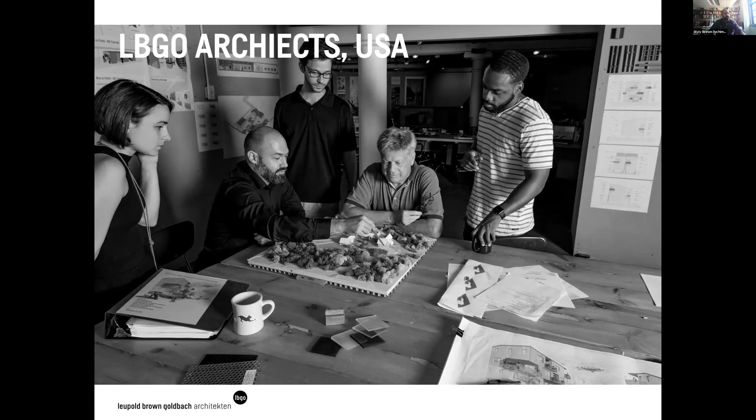We don't specialize in anything, but we work to improve the built world by developing practical yet innovative architectural solutions. Our design process is really based on extensive analysis and exploration of given conditions. We've done things all the way from stadiums to youth centers to restaurants to museums, a wide range of things that we work on in Europe and in the US.

What I like to do at the beginning of lectures is show a couple topics to demonstrate the breadth of what we do, to give you a taste and maybe a little teaser for Tanya to invite me for another lecture. One of the things I give lectures on is designing by combining landscape and interior, flowing inside and outside. This is a supermarket we designed in Germany, almost completely passively cooled. It's integrated into the landscape and made out of a lot of local materials.

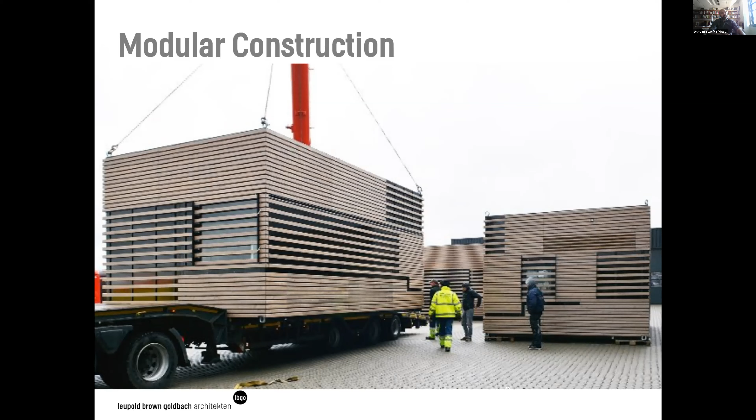But the funny thing about the teaser is I'm not actually going to talk about that, because I have another topic. Another thing we do a lot of and talk about is modular construction. These are some restaurant pods for the Expo Center in Munich, designed to be placed in courtyards with fully installed kitchens, kind of like food trucks but permanently placed, made modularly and placed over. This is the first round, and we were about to start a second round, but then COVID hit, so that's been held off. It's about innovative construction methods.

In the US, I give several lectures about sustainable and affordable housing. I've won a couple of competitions for this topic, but it's something I'm actually fairly passionate about, which is what I do a lot of my research on here at St. Louis: how to create better quality of living but with very low energy use, and making it affordable.

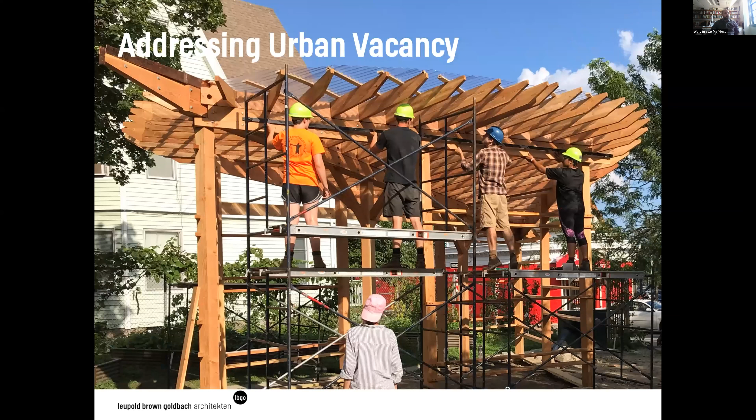And another one you might recognize - let's see, I think right here, if Olivia is still there, this is Olivia. I think she might be joining you guys, or she was helping out for a while.

This is another thing I do - I address urban vacancies. This is a project I worked on with Mass College of Art students to build a greenhouse in a vacant lot in the city of Boston. So a range of topics - these are just teasers to throw at you of different things I work on and think about, and you'll see them tie into the lecture later on.

But the topic for today is timber: yesterday, today, and tomorrow.

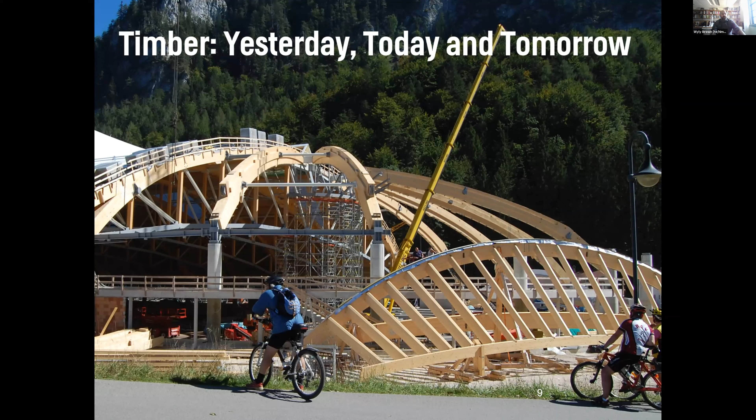Where I want to start is actually going to be kind of funny, because you guys know this project quite well - I've been following your Facebook feed from Hans House. As Tanya alluded to, you probably noticed my last name, and there's some people on the project with the same last name. Yes, I am related to them and have been involved with Hans House for decades, and been on several of these projects.

What I love about the idea of looking into historical construction methods is it's not only a means of preserving knowledge that could potentially be lost or on its way out - it's a way of really re-exploring the way we do things today by looking at the kind of decisions, decision-making, and processes that were done before.

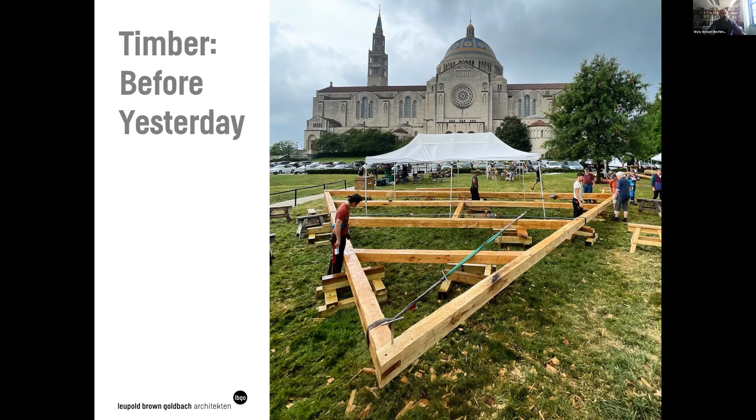Particularly when you're looking at something like Notre Dame, and we're in a state today of thinking about how do we lower energy use, petroleum products, and our carbon footprint - well, what's a better way to do that on a construction site than using an axe and a saw rather than a chainsaw or electric powered saw? Actually using human power and hand tools dramatically reduces the carbon footprint.

And we also start to think about this triumvirate, or three-legged stool, of technique, tool, and material. You start to think about how decisions were made in the time period Notre Dame was being built. Why use that material? Why use that type of joinery? Why use those tools? Why not something else?

Is this something that could be repeated today, other than in this thing? Probably not - it's probably not an efficient way to do it. I think one of the main issues is the lack of huge old growth forests, but it's something we can definitely look back at, emulating that process to think about what conditions today we might change or maneuver based on tradition, or old skills, knowledge, and tools.

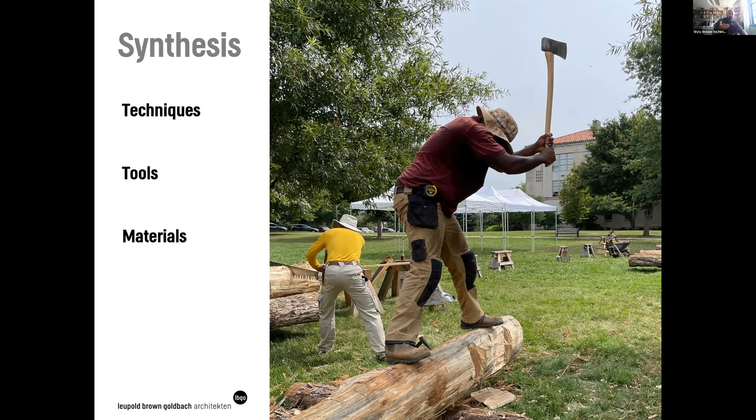Another amazing thing about it - again, I'm just stealing Hans House Facebook shots - is on projects like this, is that interaction, communication, and community. In a design project in architecture school we always think about forms and spaces, but what's wonderful about a building project, particularly going back in time and looking at another age, is really the community that's created, that bond of going through the process.

I know I'm telling you things you already know, since this is what you guys are in the middle of, but I think it's an important basis for thinking about how to go forward - by in fact looking backwards. I remember sound bites like 'you can't move forward by looking backwards,' but I completely disagree. I think one of the best ways to move forward is to first start by looking backwards.

So let's look at timber yesterday. I'm going to look at it on a small scale to start with, and then quickly get to a larger scale. Actually, Tanya, how long am I set for this lecture? Because I can make it really long or really short - what's the anticipated timeline?

Oh, okay, I can't hear you, but... This isn't that high - we're slotted for an hour, but... Okay, no, I can make that work. I'll just have to talk a little quicker and not be so verbose.

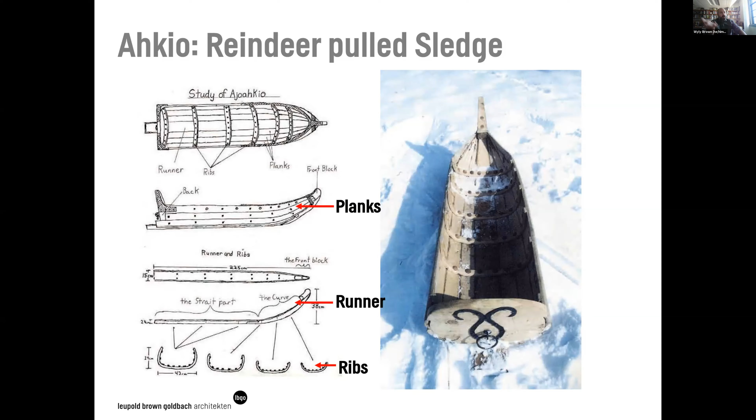Now let's jump up to timber today. Chronologically, I actually built these before this sled, but in the sense of designing with timber for performance on a small scale, I was looking at whitewater paddles, and the way we can look at specific wood species for their performative aspects in order to optimize a performative instrument.

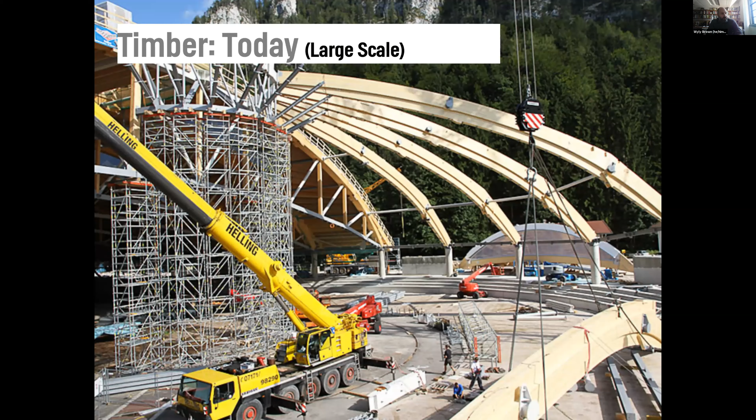Okay, so now let's jump up to a whole other scale of timber today. This is a speed skating stadium designed for southern Germany. This is one of the very first large scale projects I worked on back when I was working at a Danish architecture firm, in a town called Inzell, Germany.

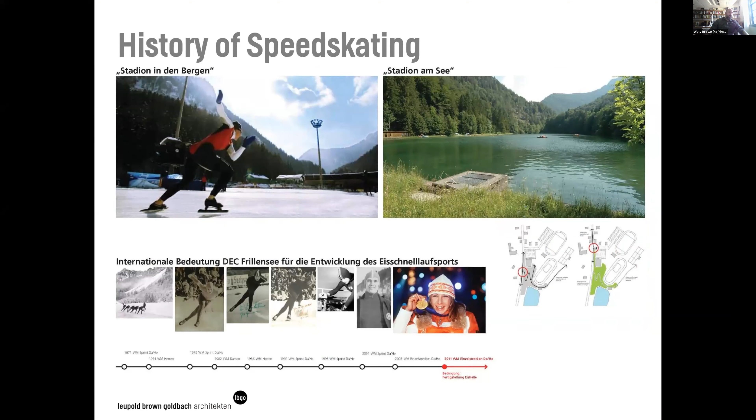It's an alpine town with a long history of speed skating. A lot of people have grown up here and gone on to be Olympic gold medalists or gold medalists in the speed skating World Cups. So they have this long tradition of speed skating, and they have this open stadium that they've had for a number of years.

But the issue became, around 2005, the rules of international speed skating changed, because the difference between first place, the gold medalist, and fifth place was often within one hundredth of a second. Sometimes between first and third place it was within a thousandth of a second. So if you have an open air stadium like this, you're only racing two skaters at the same time, some in the morning and some in the afternoon. And if you suddenly have a prevailing wind shift, it gives one skater an advantage and the other a disadvantage, depending on which way the wind's blowing.

So the rules changed to require a roof and a climatized track in order to continue to maintain world-class competitions. Inzell had this choice to make: do we want to let this fall into history and keep training people here, but really at a low amateur level, since at a professional level they need to be inside to train for proper conditions? Or do we want to build a new stadium?

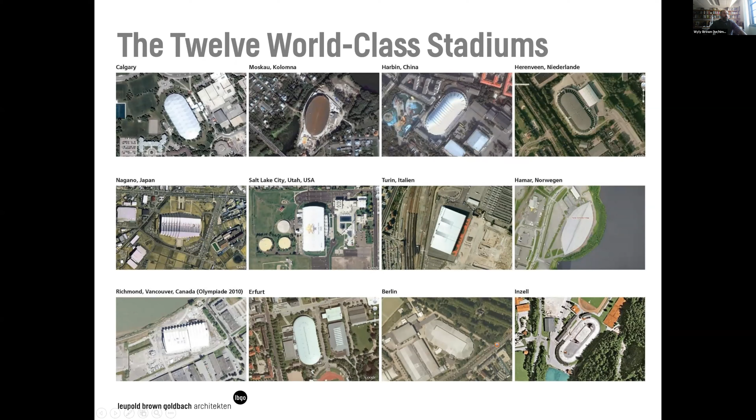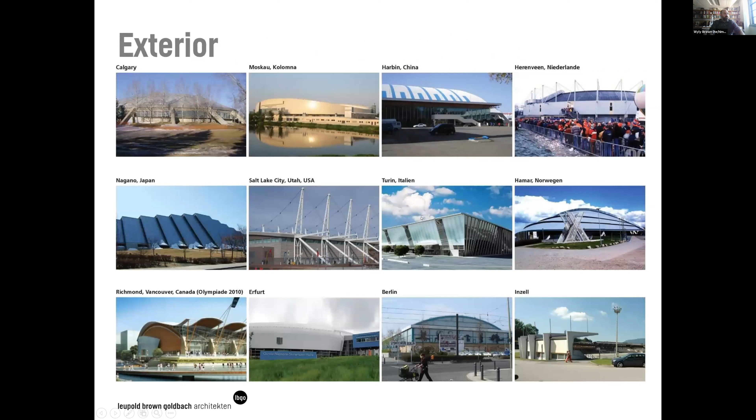Speed skating stadiums typically find themselves near train tracks or in an industrial area, not the nicest part of town. They're formally sometimes a little interesting structurally because of the huge wide spans, but for the most part they're just closed boxes with no access to daylight. When you're in them, you don't know if it's raining, snowing, daytime, or nighttime.

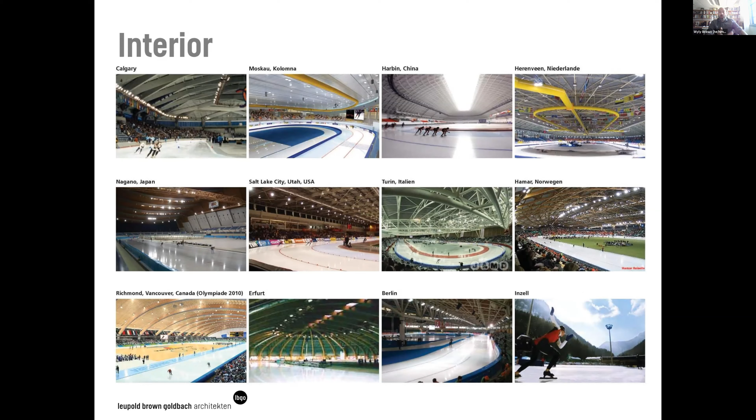So we came up with this idea. At the same time, we have this beautiful scenery you see down here on the right, and to block that out would be horrible. You really want to see where you're at, look at the beautiful mountains while skating, training, or watching someone else skate, and maintain this connection between inside and outside while still fulfilling those technical requirements.

So we came up with what I like to call the dumb diagram, or the nicer name, the systematic diagram, where basically we were going to build this globulous cloud that sits over a continuous landscape which becomes the track and the stands, maintaining the connection with the lake and the view of local mountains while allowing daylight to filter into the stadium.

This was even before we thought about materials or structure. These were just the concepts we wanted to work with, and then the question became how do we start to implement that?

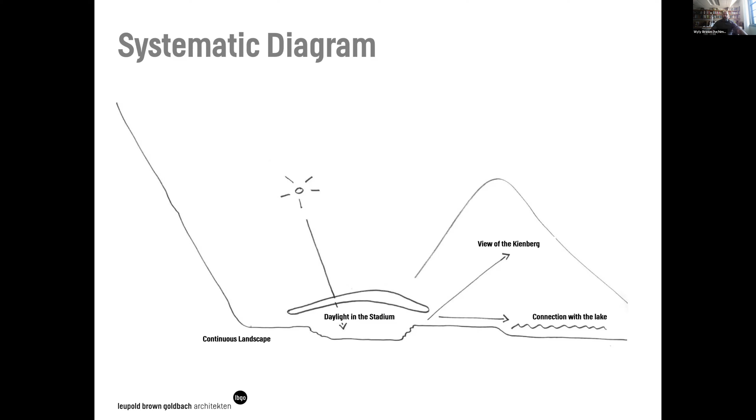The first thing we did was look at the span, which is close to 270 or 280 linear feet, so we're talking bridge scale. We really needed to focus on the structural system, and there was a desire not to have any columns in the middle.

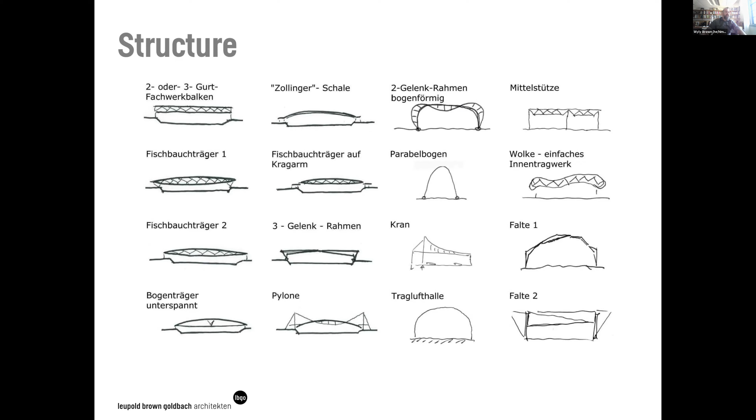So we started exploring different structural systems, which of course tie themselves to materials at some point, and we landed on going with a simple single span truss. And you were right in the middle of Alpine Bavaria.

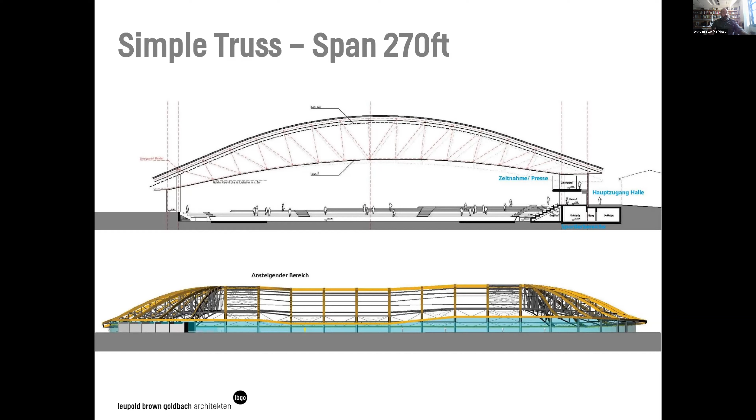The other question became how much steel are we going to use and how much wood are we capable of using? Can we even span something like this in wood, a locally available material, and what formal possibilities does that give us? At this point we were still mainly exploring on a pragmatic, financial, and constructability basis, because we had a really tight schedule, but it was always in the back of our minds.

Initially we were thinking we'd do a very lightweight, filigree roof with lots of steel bits, maybe a few wood elements, and allow light to filter through. But we immediately realized that was technically very difficult given the snow loads we were going to get.

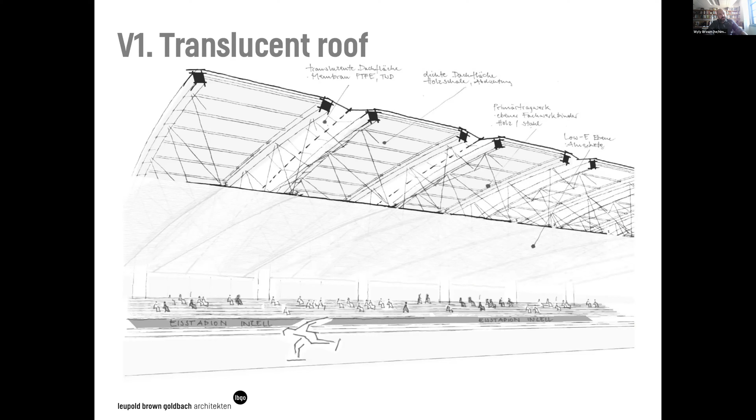We're going to get 6 to 8 feet of snow on top of this entire roof for a good part of the season. Just the year before, an ice skating stadium a few miles down the road had collapsed, and it was a wood structure. So the engineering requirements had suddenly been elevated to a much higher safety level, and we had to contend with these new rules coming out.

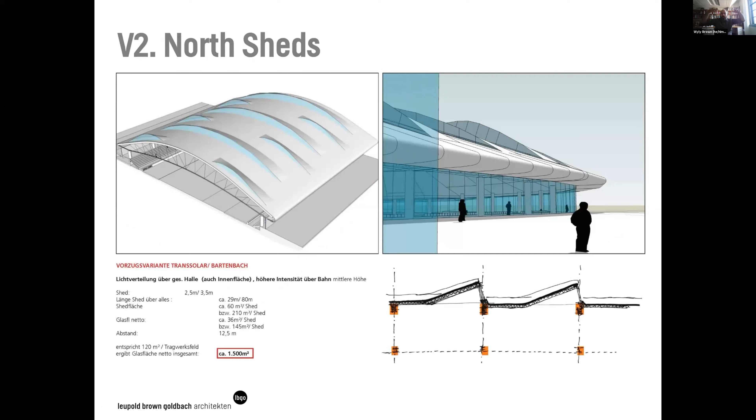So we started thinking, what if we use some ETFE foil membrane lights to allow light in right over the track and maybe down the middle a little bit? We explored what if we did north-facing sheds or lights that allowed only diffuse light in. That's where we started landing, as the most technically possible option was these north sheds. To test this, we did some daylight simulations to see how much light was getting in.

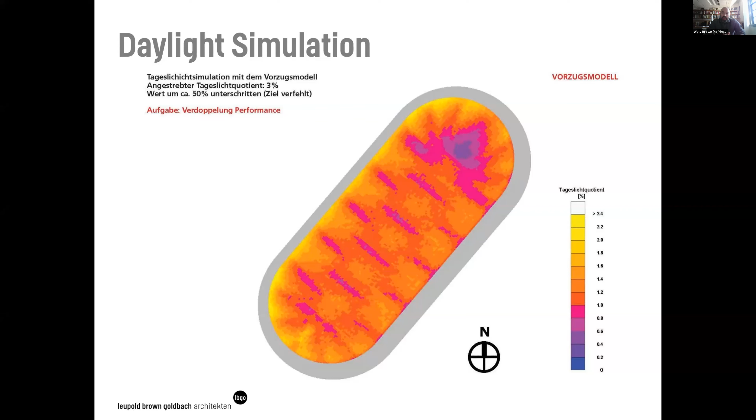And we saw that at certain sides of it, we could get enough light, but in the middle we needed a bit more light. So we had to start adjusting the shape and sizes of these openings to optimize the daylight. But at the same time, we had an issue where we weren't able to allow any direct light from going through these skylights and hitting the track.

So we created this, which is now actually pretty standard in Rhino, a means of evaluating day by day, hour by hour, where the sun position was and if light would touch the track. Daylight can't touch the ice because it makes it soft at that point, and if it's soft, that means it's slow. Depending on the angle of the sun, you might have hard ice where there's no daylight hitting it, and very soft ice elsewhere.

That would be very similar to when you're rollerblading and you suddenly hit gravel. It could actually be dangerous, it could have people trip and fall because it's that much slower than where they're getting speed. So we had to find the impossible mean between two conditions: maximizing daylight, but minimizing or eliminating direct light onto the track.

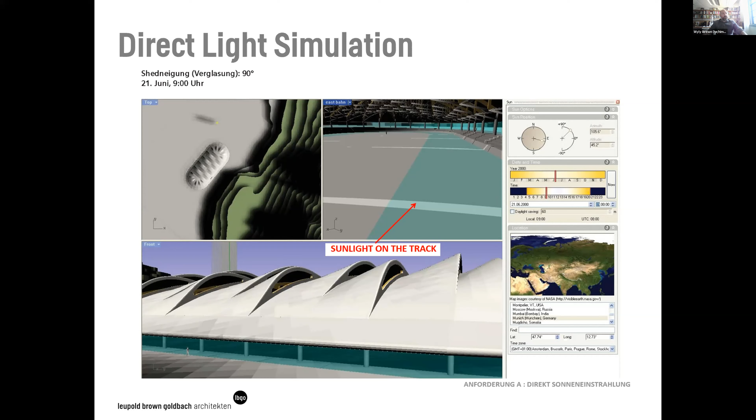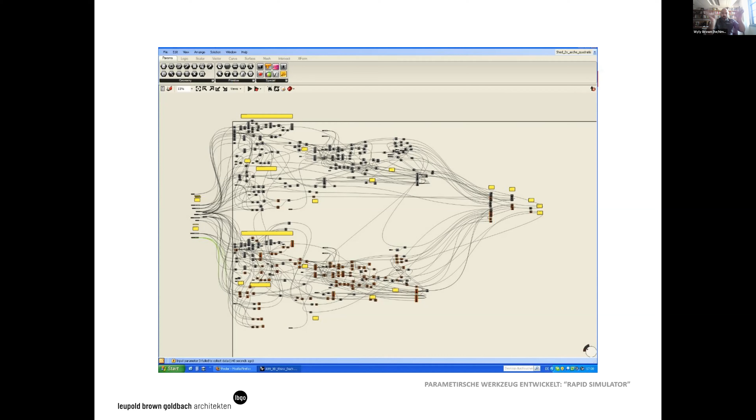So we created a complex, dynamic Grasshopper script that allowed us to change things very quickly, simulate what the results would be, and come to a conclusion iteratively using digital technology.

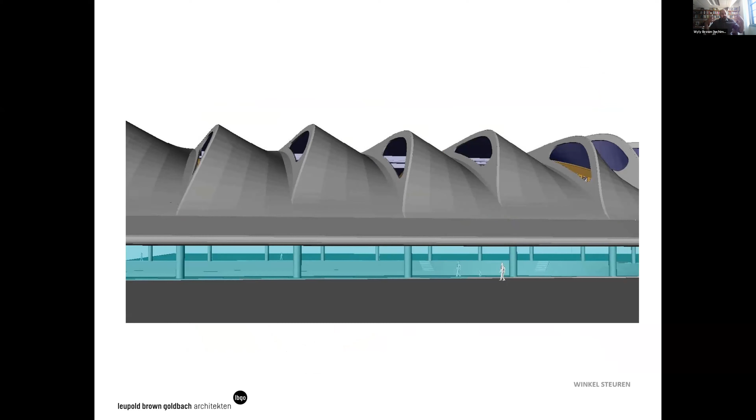So we created a script that would allow us to take these sheds and move them around, change the size of the openings with just basic sliders, change the angles, and play with what was the optimal location, running it through, seeing if any daylight hit the track, simulating how much daylight was going in, if it was sufficient.

And we very quickly, through this iteration and these simulations, in concert with Transsolar, which is a climate engineering firm, and some structural engineers, we realized those middle sheds were not going to work.

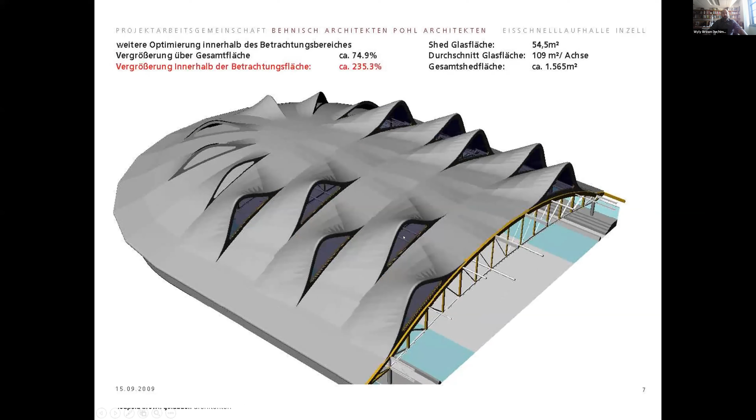So we split them. We tried to make that work. We realized we needed enough light, so we made these sheds much bigger.

And then we saw that as we start making these sheds bigger, snow is going to build up and start sliding against these skylights, which would cause major pressure.

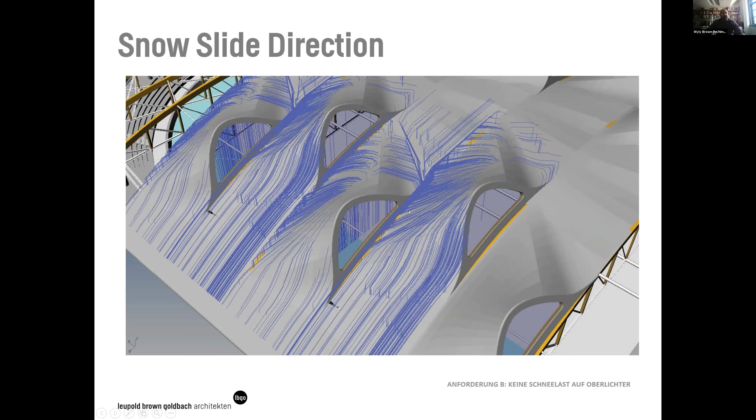So we wrote another little script to show the direction that snow would slide on these sheds. All these blue lines are the direction snow would slide. Here, snow would slide down and be harmless, but any snow that built up here would slide down and hit that skylight. So we had to take that into account.

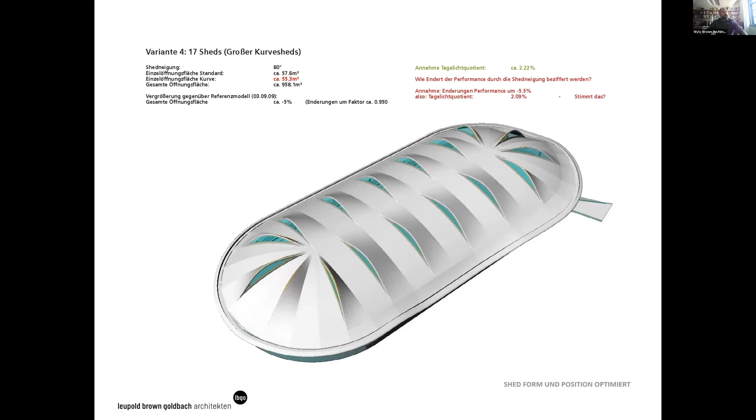So we continued using these simulations and reworking the form. We flipped them around, we halved them but made them larger. We did some shifting to allow for getting some snow in later and getting some skating later in the season. And then when we came up with a form that worked, boom, we rendered it.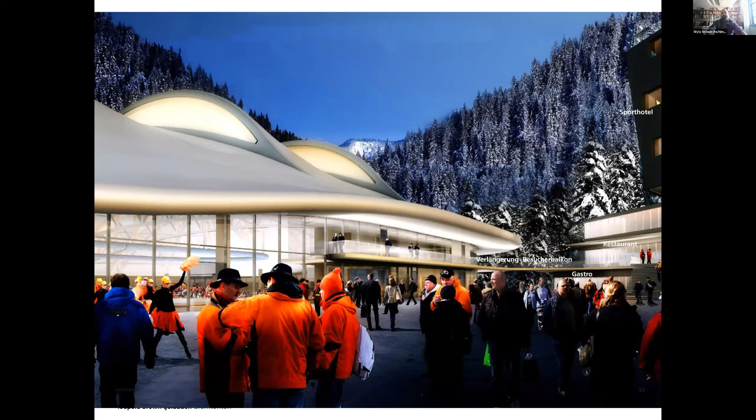We explained it to the client, we had the engineer pre-check it, and we came up with this form that would work technically. The question came, of course: well, how do you actually build a form like this? What's the best material to get these complex curves and get this geometry?

So we did a couple experiments where we looked at how you would build this out of metal or steel, and how you'd get those curves. What's interesting about steel is it's very good at making straight lines, but as soon as you do large curves, you have to cut the curved web for an I-beam out of a much larger piece of steel. So you're using huge amounts of material that produces waste that will be recycled, but you're still transporting, creating, extruding this huge amount of material, and welding a lot of custom beams.

Whereas when we looked back at how to use wood, I thought, hey, what about that paddle I did? It's basically the same idea. We've got three elements: a roof, which is kind of standardized, an edge condition that's bent around it, and these skylights that are formed and curved. It's basically a really big paddle. It's just timber, and you pick the species and the construction method to match the specific local need.

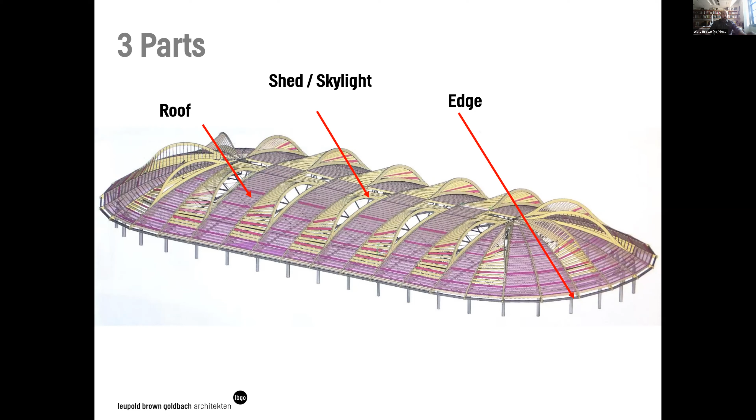And we drew it up. So here's an actual bid document for the roof. It's a little hard to see on the screen here, but every one of those joists, which appear curved, are actually straight lines.

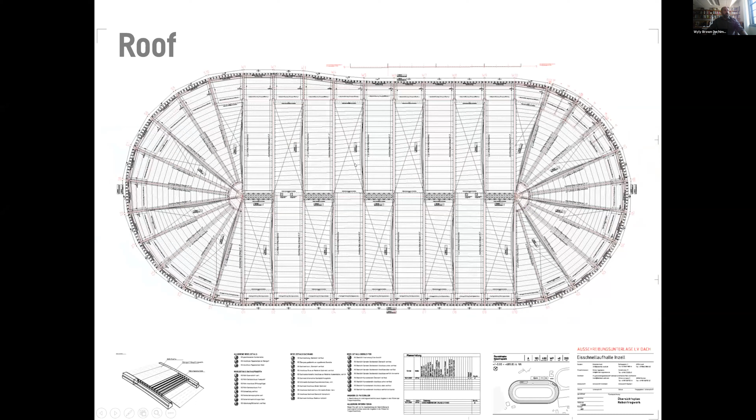The only curved elements are these front pieces, and then the ones that go around the edge. You can actually count the number of joists, and each one of these shed roofs is designed and created individually where it's located, with its exact shape and requirements.

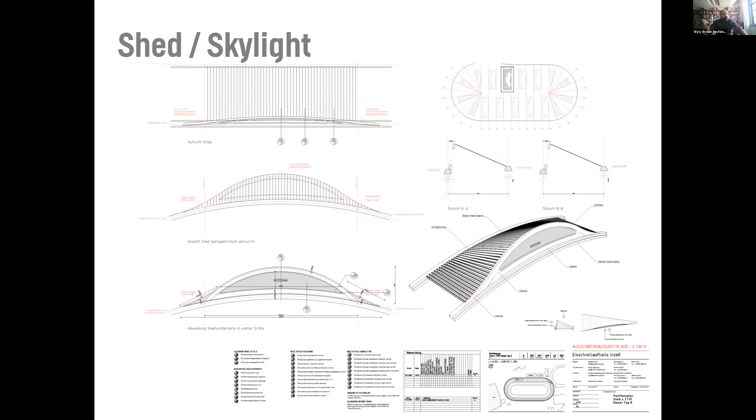We discovered that creating curved wood elements at this scale is pretty much just as easy as creating straight wood elements, because what you're doing is cutting it into little pieces and gluing it together. Here's that edge condition we see down here, kind of floating around the edge. We can create this curved system using cross-laminated timber, CLT, which is essentially like large pieces of plywood, and create custom forms.

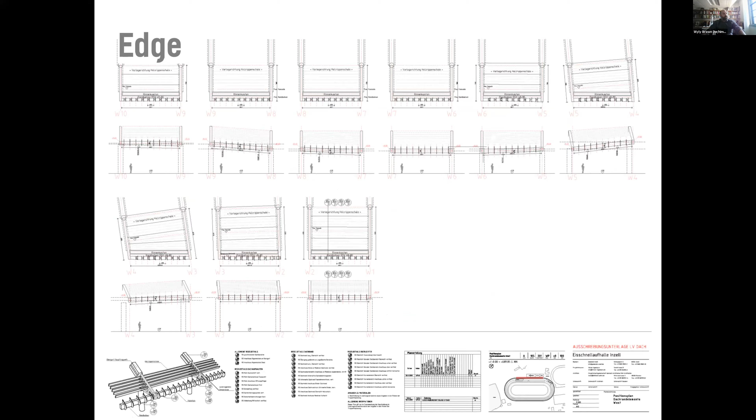Here's a picture of this enormous wooden truss. This is about 30 feet tall in the middle, meaning the truss from the bottom chord to the upper chord is 30 feet. You'll see that in a moment.

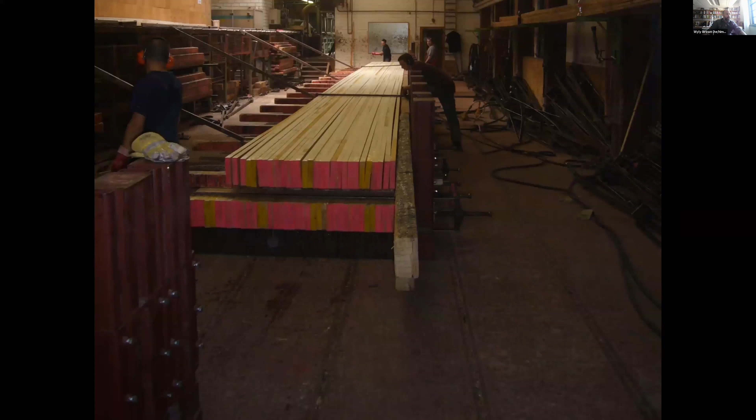We were able to make these curved wooden beams fairly simply, mostly with materials that came from within a few hundred kilometers. They were processed less than 80 kilometers from the site, and they were delivered - everything locally produced.

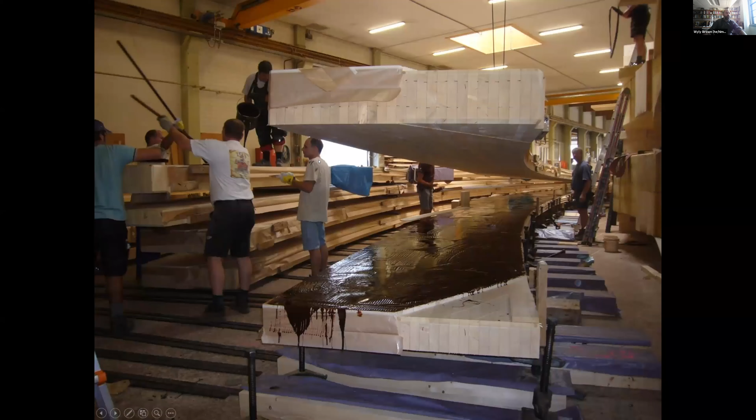You can very easily make curved pieces of wood by cutting them into thin strips, curving them, clamping them, and now you have fixed curved structural elements. Clamp it all together and then install it on site.

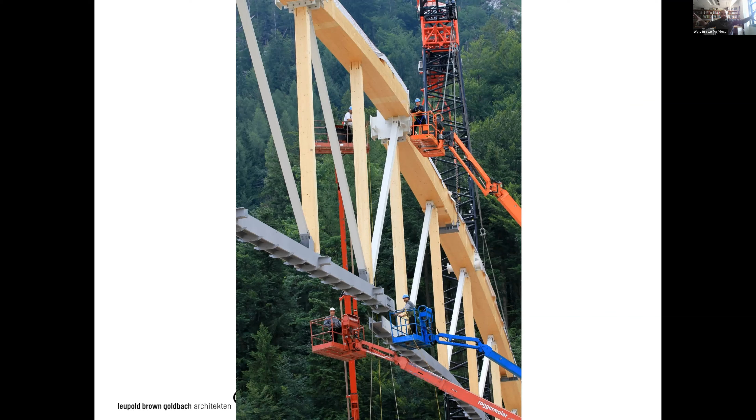So you start to see the scale of what's going on here. It's just about creating curved elements from straight pieces by scaling them down to a point where you can bend them fairly easily and put them back together.

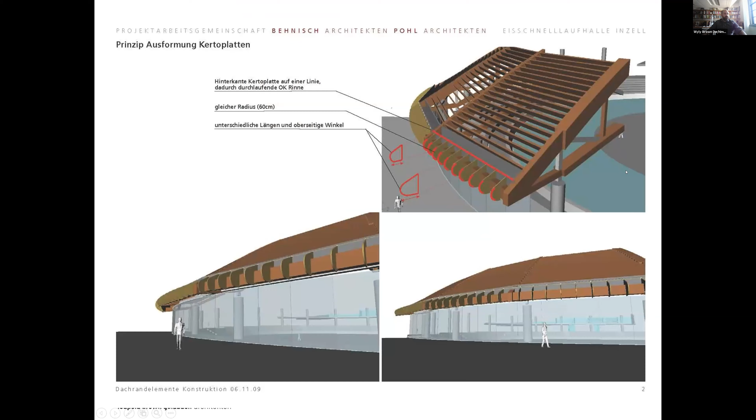Here's this edge condition, which is a compound curve where it curves not only in this direction, but sometimes up and down in the linear direction. That's created by just taking CLT, cross-laminated timber, and cutting it like plywood, creating these profiles that are then stacked.

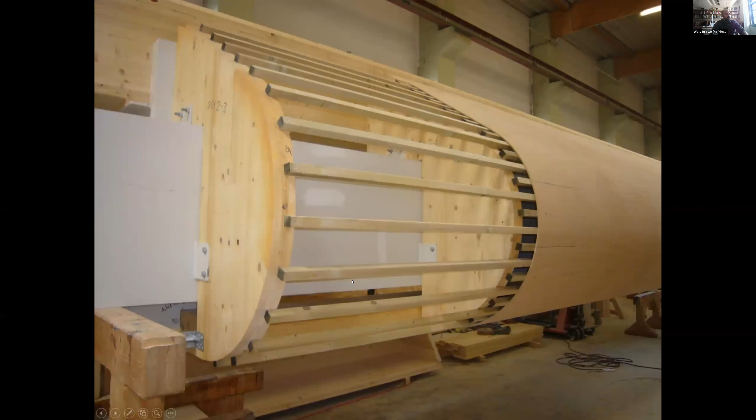Then wooden elements are spanned between, and then you take a flexible, thin sheet of plywood, form it around, and suddenly you have a whole series of these barrel-shaped wooden structures that are basically compound curves, all made very simply, very cheaply, very quickly out of wood.

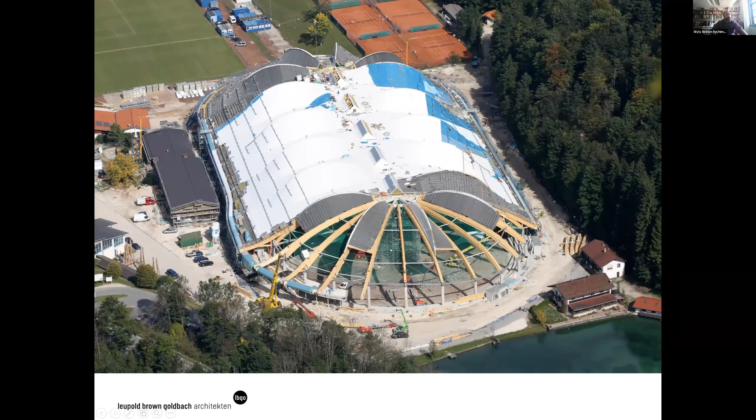Because of the fact that it's made out of wood, we weren't allowed to leave it exposed because the ice would radiate cold and cause condensation to build up on the wood. So unfortunately, we had to cover the structure in this low emissivity membrane.

And here was the World Cup in 2011, I believe. But we were able to actually create this very complex form using the properties of timber, and in a very sustainable way, gathering timber from all within a couple hundred kilometers.

So then it became this kind of iconic building along with their church. This is the town - there are two main things. A town of 3,500 people had their church as one of the key symbolic things, particularly that steeple, and their speed skating, and then the mountains.

So it's really looking at using timber technology today. You have cross-laminated timber and glue-laminated timber, which allows you to have a wide variety of forms. It's incredibly structurally stable, and it's fairly simple and relatively inexpensive to build that way.

So this is a lot of the opportunities that wood provides today. It can be used for all sorts of different types of constructions, and particularly cross-laminated timber is going into creating modular construction and all different types of things that are coming out of it.

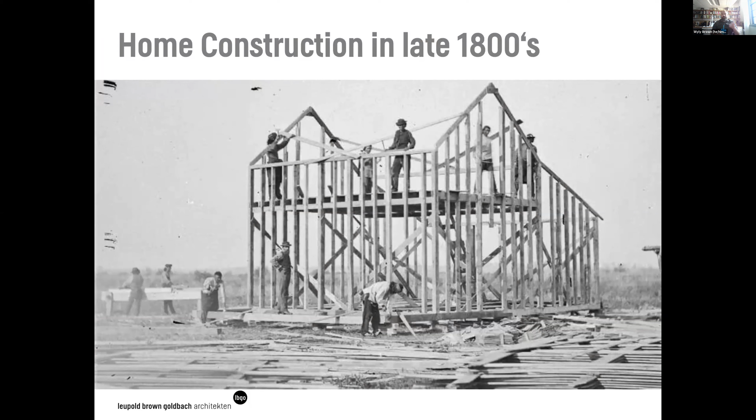I'm going to jump scale a bit here because, of course, this is much smaller than the stadium. Here's home construction in the late 1800s - basically balloon framing in the U.S. You have this vision of a nearby forest that wood was cut down from, and you guys are kind of going through this right now. It's milled into long linear elements, and you create a multi-story house, doing it mostly with hand tools and local labor.

Well, here's home construction today, which kind of strangely enough, when we're talking about timber construction, looks remarkably similar to what we just saw from over 100 years ago. This building I'm showing you is one I designed, which is LEED Platinum and won a competition for innovation - it's actually an energy positive, affordable house in the Boston area. And basically the same means of construction: you have some local labor walking around with some sticks, putting it together on site.

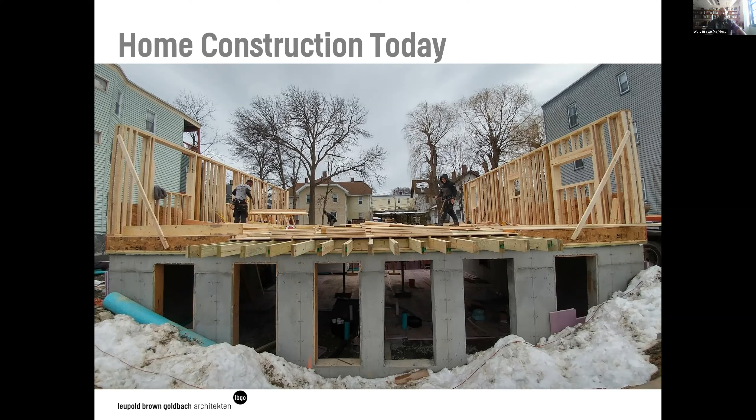Since the financial crisis in 2008, the increase in demand for new homes combined with a shortage of skilled home builders has been driving up construction prices. So even building the same way as we have for 150 years, prices have been going up and up since 2008, and we're not building enough homes. In fact, in 2019, we were about 200,000 homes short of fulfilling our need, which is increasing demand for home builders, while young people are not going into the trades as much as they were 10, 15, 20 years ago. So costs are going up, and maybe there's a need for rethinking.

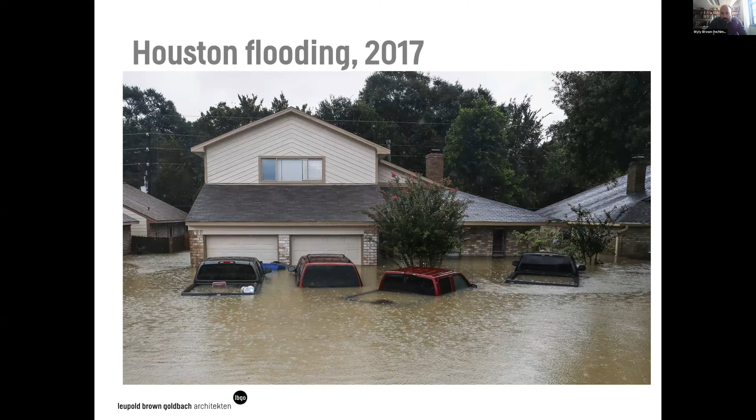There's also a question of what climate in the US your house is designed for. Is it designed for the California wildfires happening this summer and in recent summers? Are material choices optimal against fire where that happens frequently? Are they optimal for the flooding that might happen in Houston? For the snowfall in Colorado? Or the dust storms in Arizona and the desert Southwest?

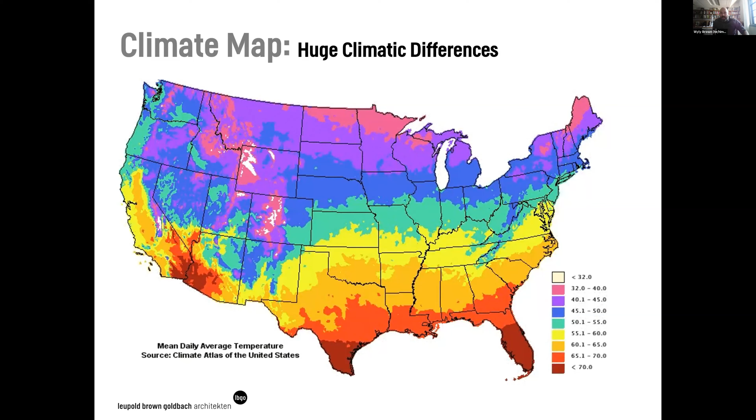The question I'd ask is: which climate region is this material aisle optimized for? You go to pretty much any box store like this, anywhere across the nation, and you'll find the same supply of materials.

So the question I ask is, what is the alternative? What is the future of this? It's already too expensive for us. So can we create a variety of alternative materials?

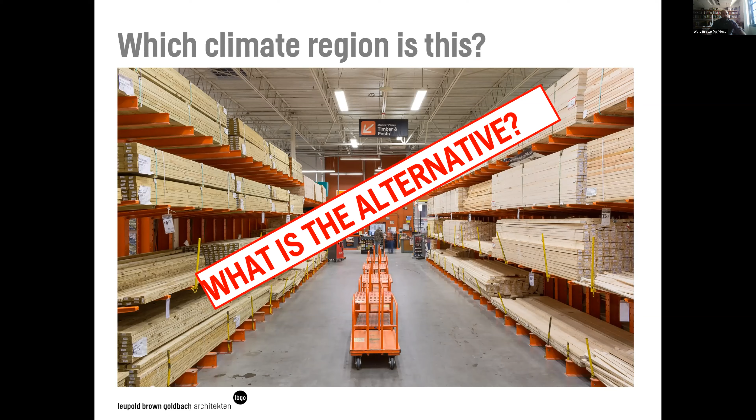This is something I happen to research in a lot of different ways. One of my favorites is a conventional material in Europe—a sustainable structural masonry that actually has very good R values, or low U values depending on how you look at it. But it's not in scope for this lecture, so I'll just throw it out there and leave it.

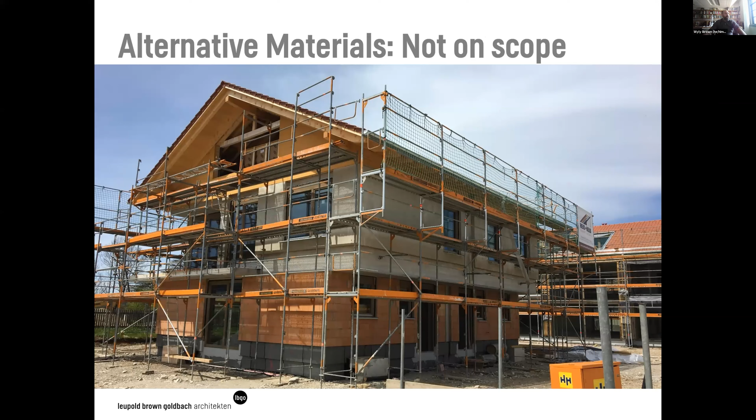But I went on a search for timber alternatives. Again, I really feel there's value in looking backwards, sideways, up and down at different locations and historical means of construction in order to answer questions we have today.

So in late 2019, a couple months before the pandemic hit, while we were still allowed to travel, I flew down to the Osa Peninsula, Costa Rica, to look at a permaculture farm and take a bamboo construction class. I arrived in the jungle next to the beach, where you can watch whales breaching and see dolphins, and you're in this location where you see this amazing bamboo structure.

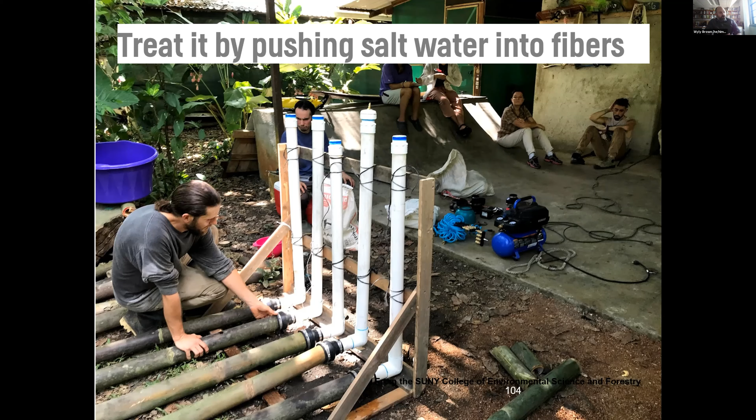Where does that bamboo come from? You walk about 100 feet to the bamboo clump, get out your Sawzall, trim a couple of bamboo stalks, and take 2 or 3 people to carry a 40-foot long piece of timber out of the woods. You treat it by buying about $800 worth of PVC and plumbing fixtures and a compressor, and you push a salt water mixture with a little borax in it to push out the sugars and fill the fibers with salt water. You stick it in a little shed for a couple months, and then you build some amazing structures, all done within a few hundred feet.

Now, I'm lying a little bit—this is Bali, not the Costa Rica place, but the same principle applies. All the timber and materials were taken from within a few hundred feet of the location, maybe a few miles.

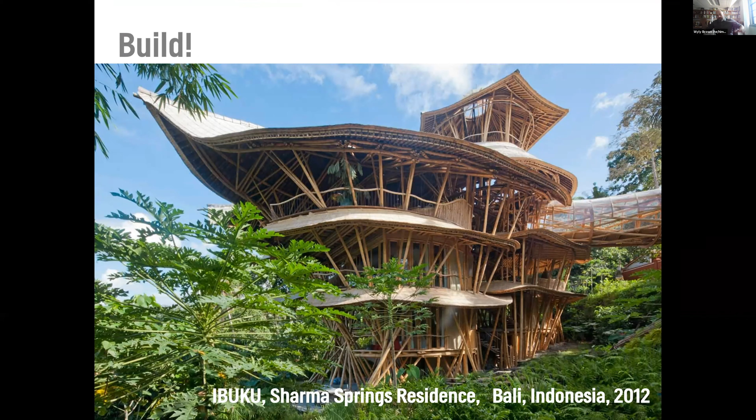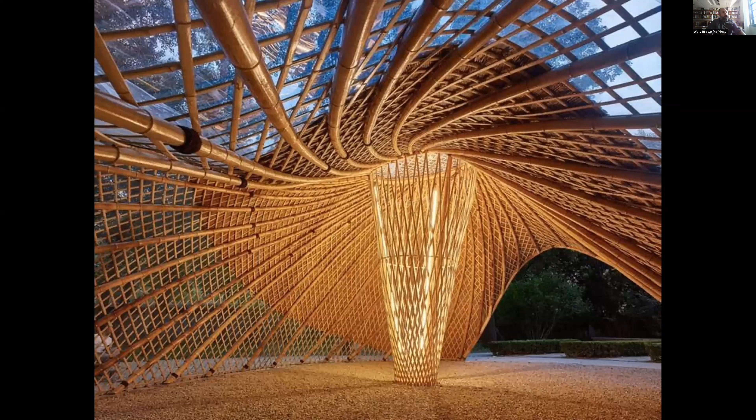Maybe there were a few little pieces of steel and other members that came from farther away, but a majority of the materials came from locally sourced, very low energy processing. So here's just some examples of what bamboo timber can actually produce. And I was like, very interesting.

So in the tradition of Robert Venturi and Learning from Las Vegas, I'm thinking, what can we learn from San Jose? This is great in a tropical environment, but can we learn something from this? I pulled some slides because I was worried my lecture was getting too long. You're even able to go get lunch by pulling a papaya off the tree or picking a pineapple off the ground.

You're in a place where it's a permaculture forest, where the food we were eating was locally grown, the materials we were building all the things out of was locally grown, and the labor came in from St. Louis and from all around the world. But is this something we could go back to? Because that was the idea from the initial 1800s balloon framing, the idea of locally grown materials, which we've kind of lost in the shuffle of trying to maintain that convention.

So looking at the climate zone map again, with the hardiness zones, first thing I discovered is that there's actually plenty of species of timber bamboo that could grow in St. Louis, which is climate zone 6. But you see climate zone 7, where you guys are, probably even more species would grow, because there's like 1,400 different species of this stuff. And what could grow here could grow up even in New England, New York, and Boston, and a lot of different places.

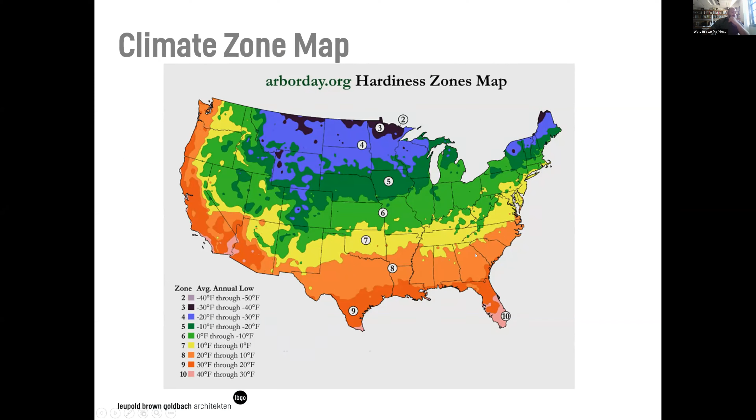Here's a handful of different timber species that could grow there. I even brought home a chunk. If you guys can see, this is a piece of timber bamboo right here. It's pretty big and round, probably 6+ inches in diameter, with a thick wall. It's just a little chunk because I brought it back. But this is actually a species that would grow in St. Louis. It would grow not quite in Boston, but maybe in New York. It would definitely grow in DC. It can grow readily in North Carolina, and all over the US.

And what's interesting about bamboo is it's not actually a timber, so I'm kind of lying to you. It's a grass, and it can grow within a handful of years. You can have a full harvestable bamboo grove in about 4 to 5 years. You plant the rhizomes, which start with these small little bits, and then after 4 or 5 years, the rhizome is established and will start shooting up full size timber bamboo culms. But what's interesting about bamboo is it grows very differently than we think about timber.

A softwood tree starts small and grows its way out. A piece of bamboo, once the rhizome is established after 3 or 4 years and is healthy, will shoot up a culm in its full diameter and reach its full height in about 3 months. Then it actually starts to grow inward, so the hard, incredibly high tensile and compressive strength outside is there right from the get-go. It grows inward and the inner wall starts to harden over 2 or 3 years. At about year 4 to 5, you can harvest it and have very strong timbers that are an optimal shape for a lot of things. It's round, it's hollow, it's light, it's got all the structure on the outside. It's really an optimized shape for structural struts, for example.

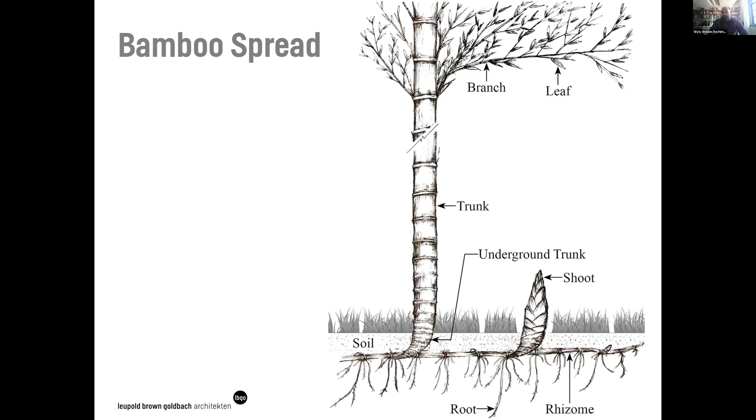Of course, one thing you have to control is how it spreads. There's a whole series of ways of doing that, which I'm not going to go into because I want to move forward. But you see here's a bamboo bud coming out, and it comes out in its full diameter and then shoots up in about just a couple months.

So I was sitting here thinking, okay, I'm back in St. Louis. Let me take a look at how this could actually be something we could do in the city. Is this an absurdity? Is this just one of those pie-in-the-sky crazy ideas that madmen think about that really goes nowhere?

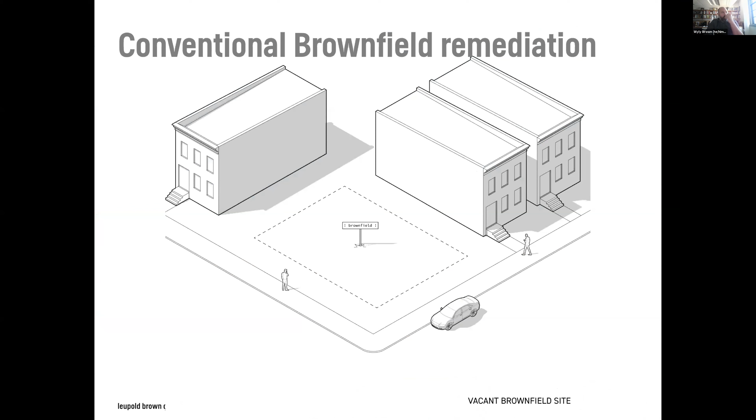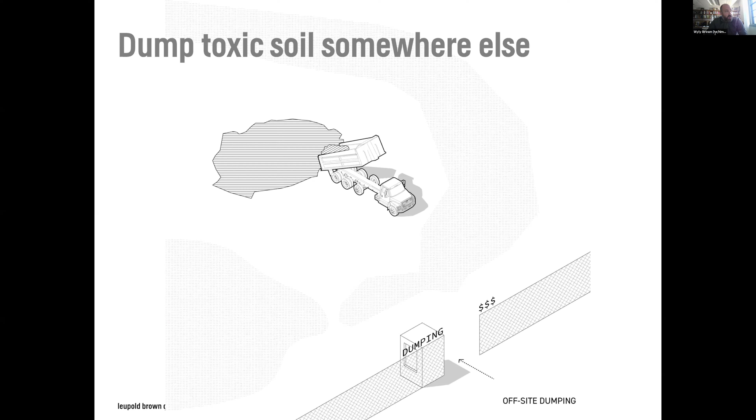So what do you have to do in order to make a site buildable? We have conventional remediation techniques. What we normally do with a brownfield site is dig up the toxic soil and dump it somewhere else, which is also questionable—where are we dumping it, and whose property are we dumping it on? Right now that's not a valuable spot of land, but maybe in the future it is. Then we bring in new soil. This is the typical way we'd remediate a site, which is very expensive. There's a lot of national funding for this, but it doesn't necessarily solve the problem.

It just kind of pushes the problem under the rug somewhere else, which, in the context of environmental racism, is maybe a whole other topic for a whole other lecture.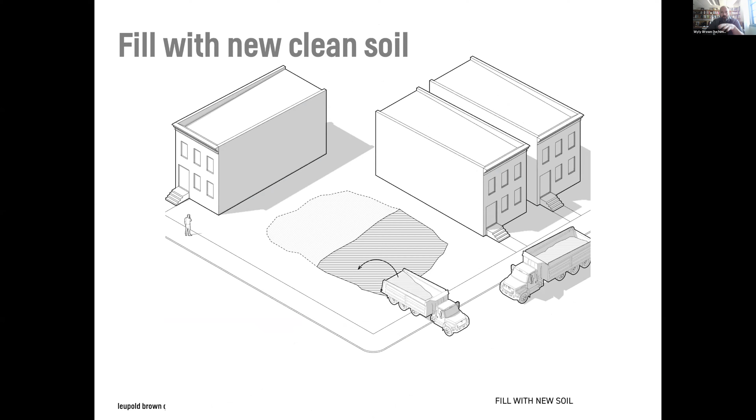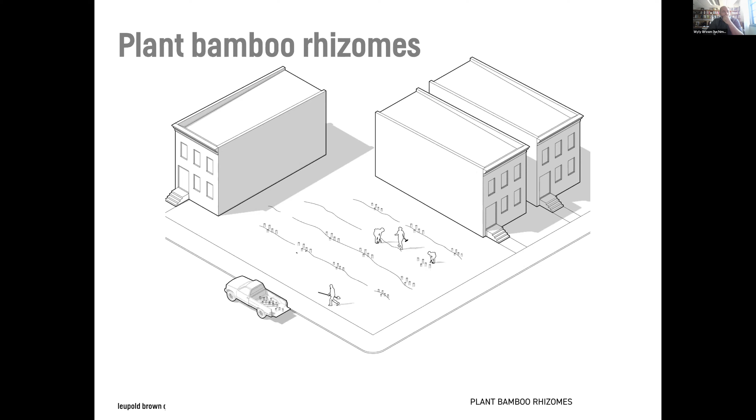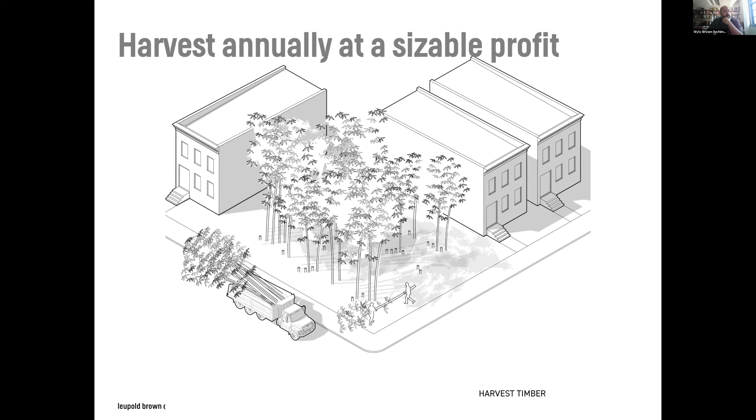But what we discovered is that in China, research shows bamboo can actually remediate heavy metals out of sites. So what if we planted bamboo in an urban condition, planted the rhizomes, enjoyed a beautiful grove park, and harvested it annually for a sizable profit? According to commercial bamboo farmers in Oregon and Florida, you can make tens of thousands of dollars per acre per year harvesting bamboo, and you're not clear-cutting it, just harvesting the culms that are a few years old. Then if you want, you can remove it and move on to the next site to build a house or something else, but you've now remediated the site.

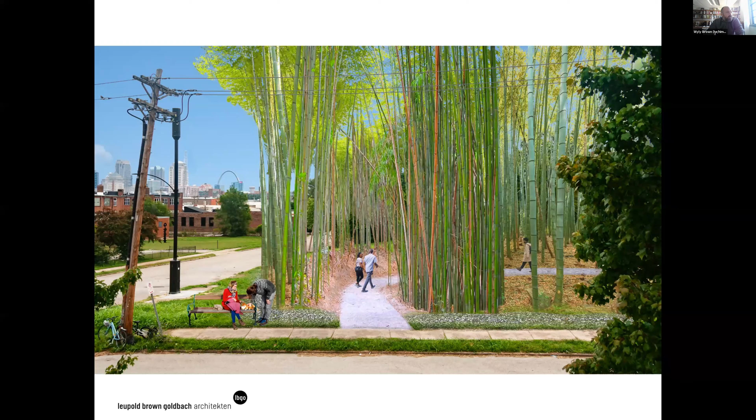So we started playing with this idea: what if we took sites like this and put a grove on it? Could this become a fun park, a destination? We started taking locations—this is Grand Boulevard, the key street in St. Louis. What if we grew a bamboo grove, maintained and managed it, and profited from it while remediating the site? Here's another one.

Urban farming, urban forestry—could it be something fun, interesting, productive? Then thinking, okay, if we suddenly had this influx of material, what would we do with it? We don't want everything to look like a Costa Rican tiki hut, where you think you're always going to buy a margarita and listen to some Jimmy Buffett. So what could we actually take and turn into an urban material?

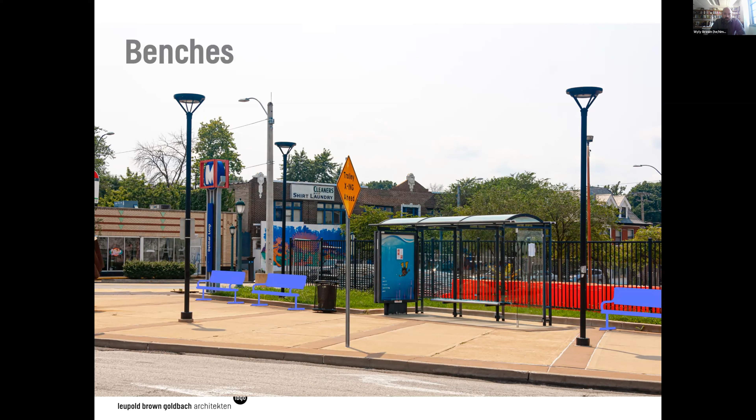So I took a street corner in St. Louis and looked at the elements. Remember, bamboo grows in a round tubular form—you can get different diameters depending on species. I'm looking at a lot of tubular structural elements in this image that happen to be made out of steel. What if we took those benches, which are basically tubular steel and bent tubular elements, and made them out of bamboo instead—a locally grown material—rather than steel, which, although a lot of it's recycled, is basically mined as ore in one place and moved here with really high energy.

It's converted into material, then goes to another location and it's extruded, then comes to another location and it's treated, then goes to another, driving all over the place again. Huge carbon footprint just in transport, let alone the carbon footprint and energy use in production of the material, or the recycling material for that matter.

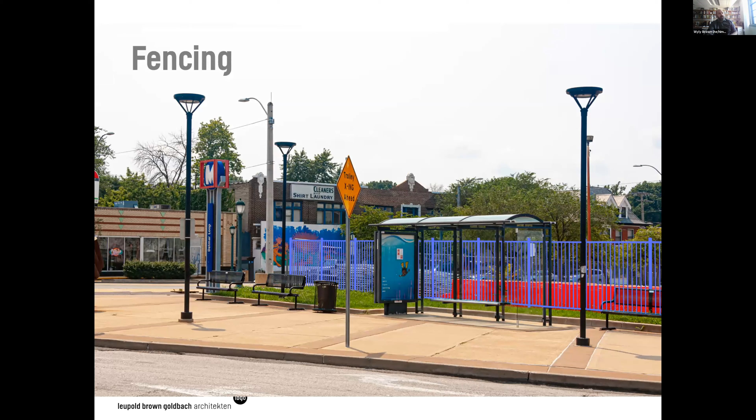What about the fencing back there? None of this stuff is really there to be aesthetically pleasing. So what if we just switched out the fencing to be bamboo, locally grown? How many emissions would we save if we grew it on one side of town, processed it on the other side of town, and installed it behind supermarkets and next to sports fields, non-aesthetic locations, but really changing the material?

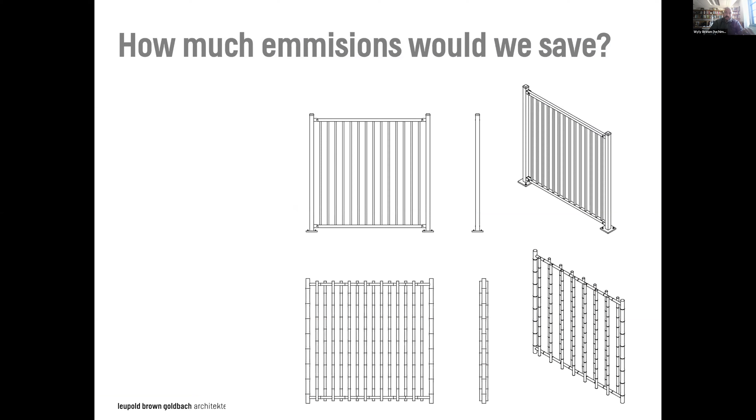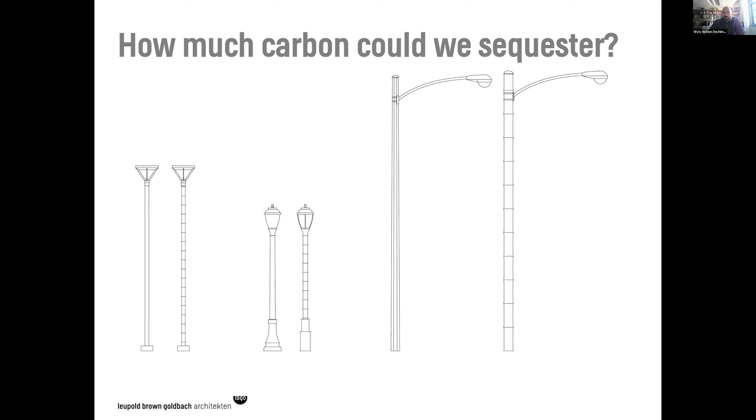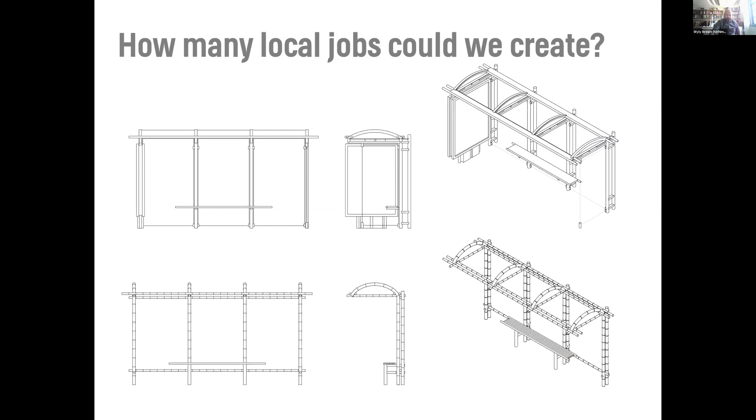What about those lampposts? Can we switch them out for bamboo? Why not? How much carbon could we sequester if we started shifting from tubular steel to tubular grown materials? Take the bus shelter—how many local jobs could we create? How much could we boost the economy locally and bring people back to St. Louis?

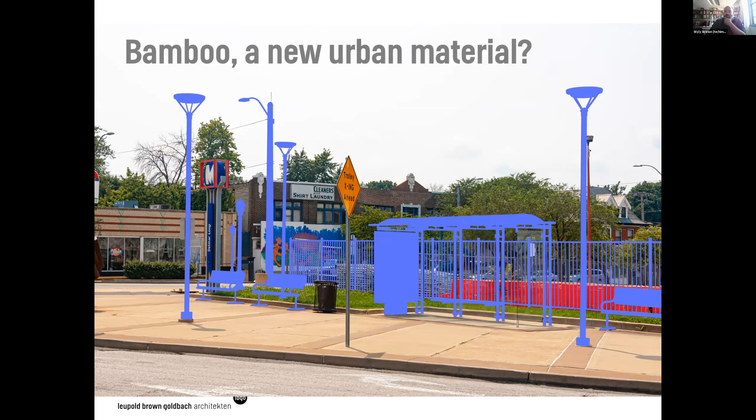So could bamboo be a new urban material? I don't know, maybe, maybe not. Be an interesting one. All this stuff I'm showing you is really hot off the presses, made last week if not this weekend, because this is exactly the question I'm posing and trying to put out there. So this is happening as we go.

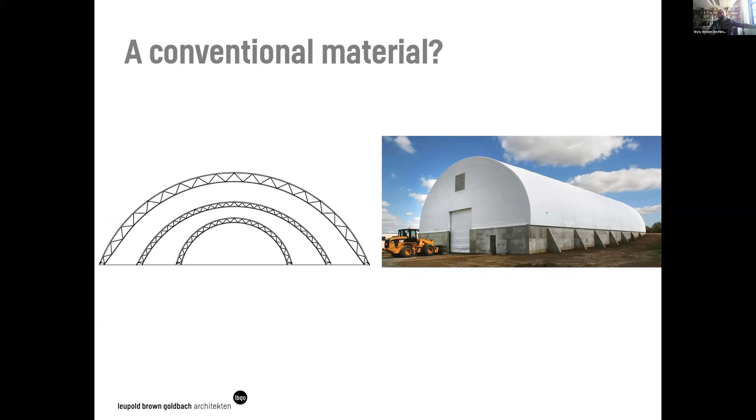Could it be a conventional material? This is a conventional agricultural structure or storage structure—over 12,000 of these were sold in the central state regions alone in 2018. It's basically just a steel frame truss with a fabric that goes over it. Could we switch those out for locally or regionally grown bamboo that grows very quickly and can be recreated every couple of years? You could create as much bamboo as you need for the structure in a handful of years, or depending on how many acres you're growing, maybe one year.

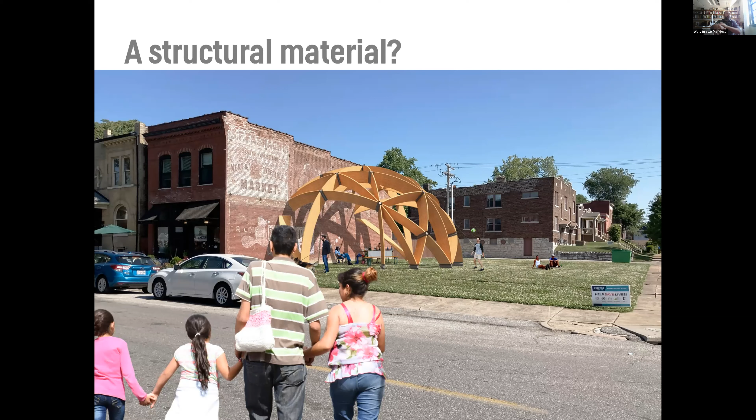Or could it be a structural material that we're using to build wild, fun geodesic domes or other structures? Could it be an inspiring material used to create shapes and forms—here's just a shade for a local garden. These are photos taken from St. Louis, experimenting with how, if we started playing with this material, we could start to think differently. How could we add an arrow to our quiver of materials to diversify what we can use, as well as regionalize and localize the production of those materials?

So what's the future of timber? Of course it's not to say we're going to stop using softwood or hardwood, but maybe we need to start thinking about a greater use, a broader band of what timber means and what construction means, and how we build the homes and buildings we live in. Look into history, look at how things were done hundreds of years ago in Europe, look at where things are being done now in certain locations. Look at indigenous technologies, local adaptations, regional ways of producing, growing, engineering and building. So I'll leave it at that.